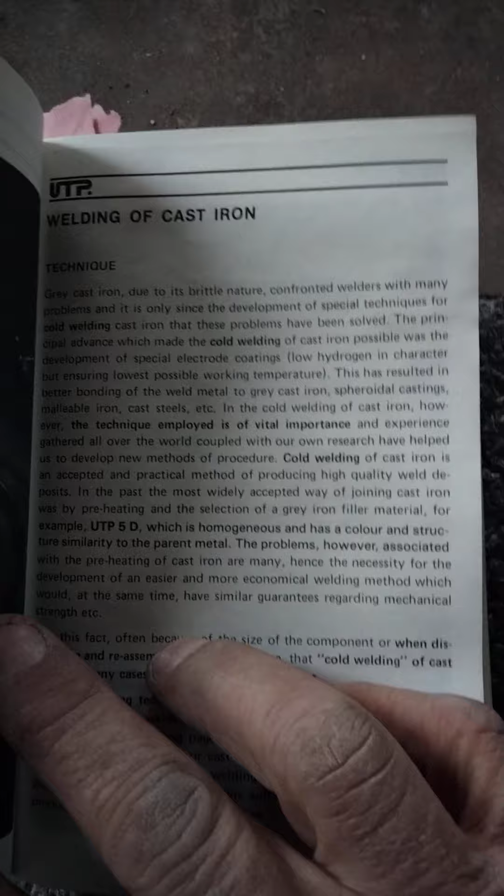I ran into a guy, well, one of my accounts there in the 90s, and they needed a bunch of brass wear lugs welded onto a steel mast on a forklift, with a bolt hole. It was a bolt through originally, and that was all jacked up and stripped out, and they were like, shit, you can't do that. And it was like, yeah, well, let's see if we can do that. Pulled out the welding Bible, flipped on through it, and this thing's pretty cool. Each section, you know, cast iron or whatever, it tells you exactly what you need to do. If you follow the steps provided in this book, it'll work every time. I've never had a problem with anything.

UTP cold welding systems for cast. They're real good on, you know, preparing and what you got to do, and pictures for how you want to be.

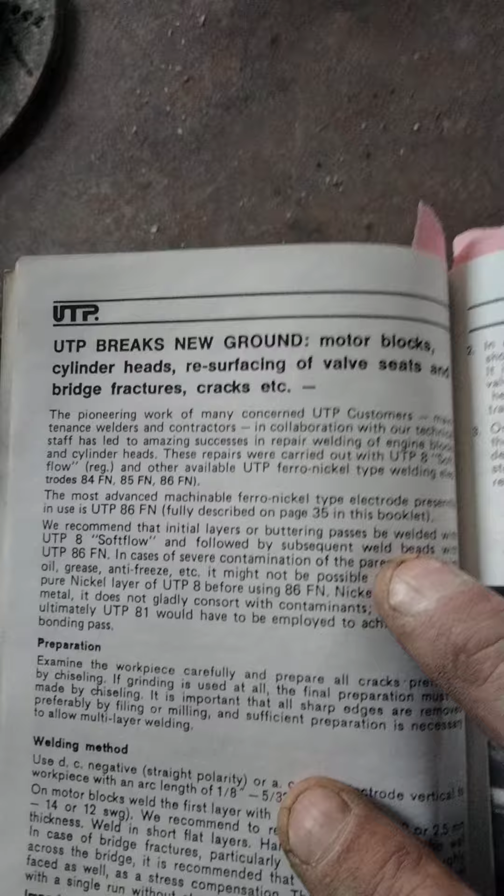So it was like, all right, so we need to weld brass or copper to steel. So I pulled out the Bible, started going through it. I put a couple things in here. Hot welding of cast iron. They got a lot of good cast stuff. UTP breaks new ground, motor blocks, cylinder heads, resurfacing of valve seats, bridge fractures, cracks, etc.

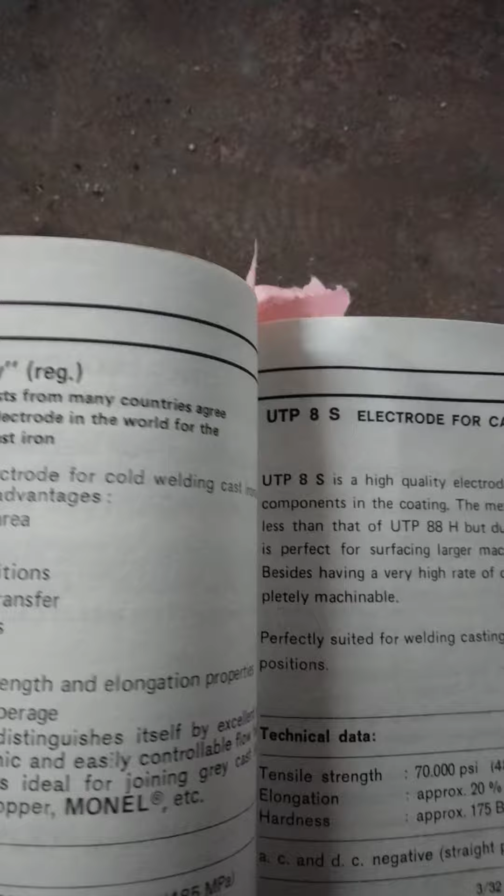But if we keep going here, I think I marked that in here somewhere. We're on into the cast stuff.

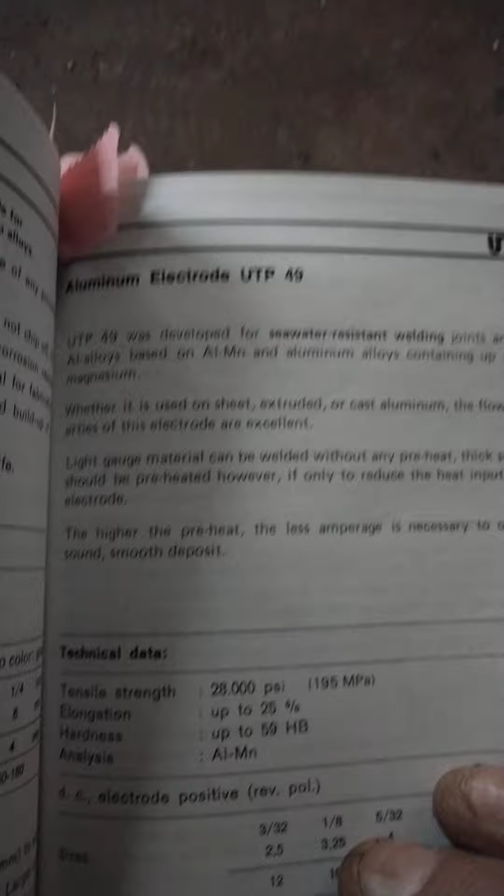Gets down into the aluminum rods, tells you all about the aluminum rods. The UTP 49 is the main aluminum rod that I used for aluminum, and it gives you all the specs. There's your elongation, there's your tensile, there's your hardness, tells you which polarity to run, how many amps you should basically be running.

I thought, unless I missed that, I thought I had just marked. Maybe it's the one after this one. I went through and kind of marked it. White metal rod, UTP 41, magnesium rod.

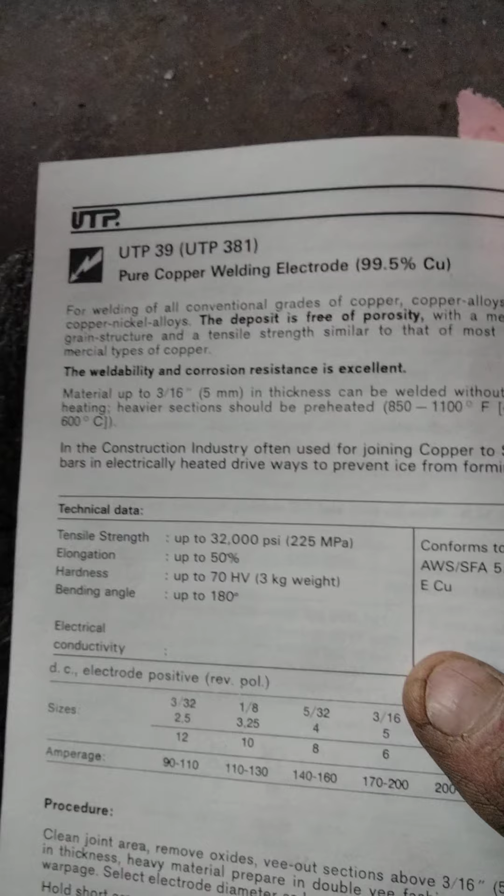They got stuff in here for the railroad, you know, that meets the specs for the stuff I've been welding on the railroad. Let's see here, where did we end up on that? There you go, UTP 39, pure copper welding electrode.

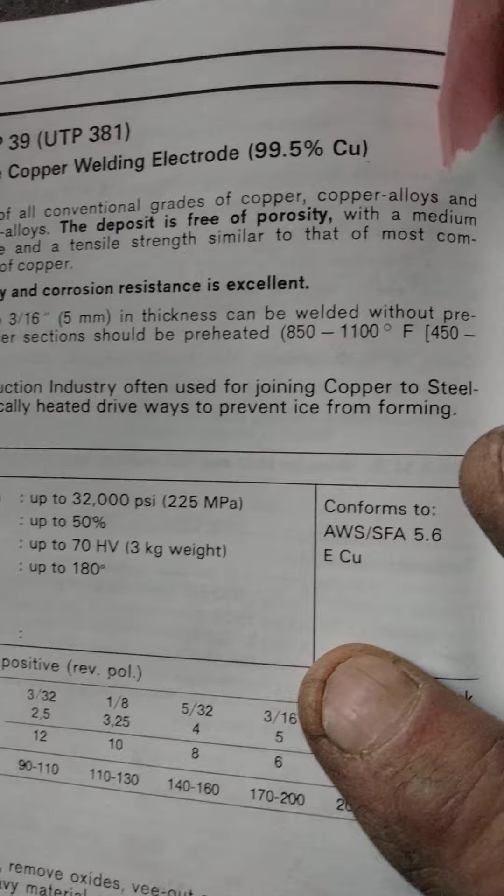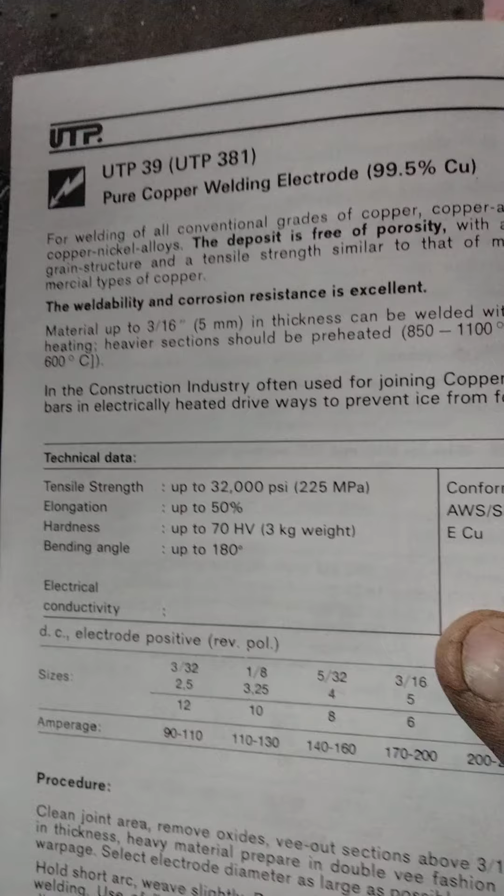In the construction industry, often used for joining copper to steel bars in electrically heated driveways to prevent ice from forming. So I ordered up some of this UTP 39, turned right around and welded the brass and copper wear plates straight onto the steel mast. Did that for probably 6 different forklifts, I bet, for them. Just stick welded the brass or the copper straight to the steel. Not one of them broke or anything, so elongation up to 50%.

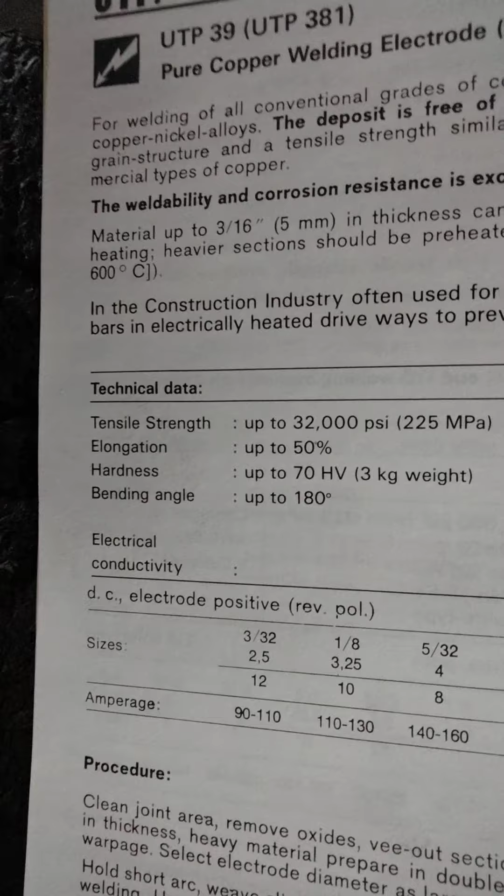Holy cow, that's killer. 32 on your tensile strength. But it doesn't matter what you run into. If you have your little Bible, you can pull this out and look up anything that you need to do.

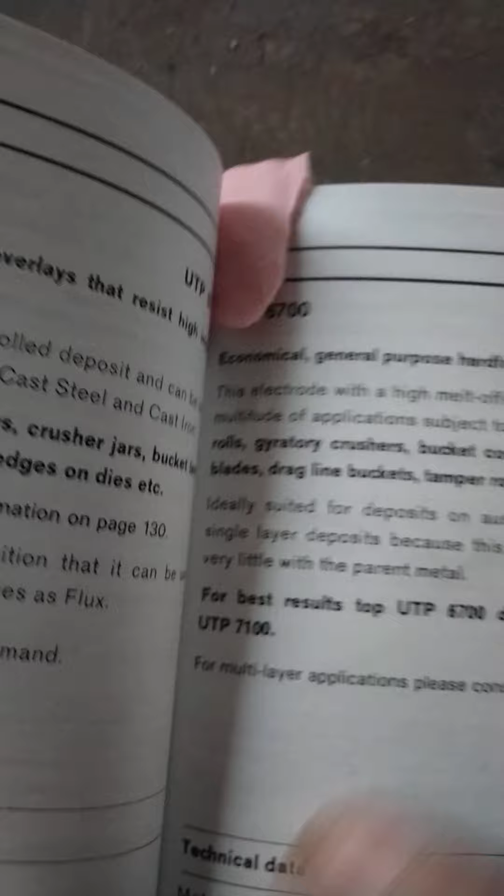I just keep one in the truck with me so that, you know, there's the UTP rail weld. This is the hard rod that I used before I found metal powder rod. It's UTP 6700, and it's a double layer thing. You're supposed to put down the 6700, and then you're supposed to cap it with the UTP 7100.

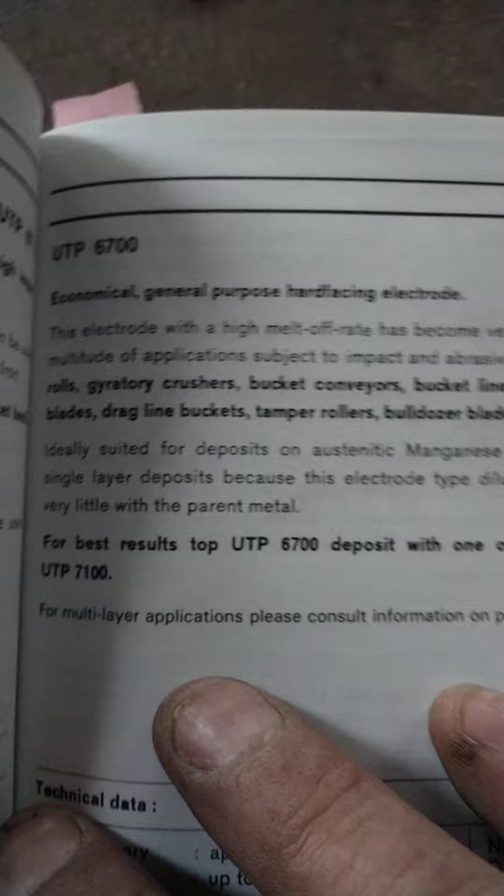That's what I used on wood grinders for 20 years, was this UTP 6700, until I found the metal powder rod. If you go back through my videos, you'll have to go back about a year or so, but there's a video on metal powder rods, and that's just way better.

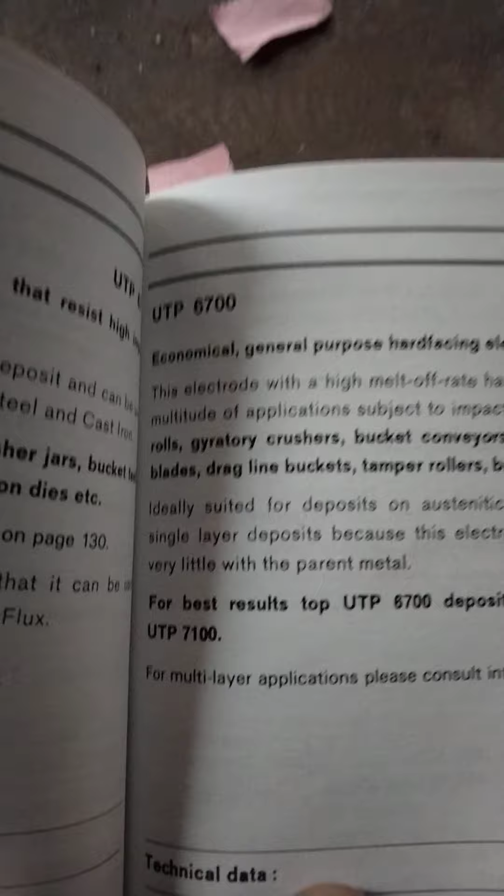One of the main reasons was the rod recovery rate on the 6700, and I put that in the video that I made a year ago, is only 130%. The rod recovery rate on the metal powder rod is 200%. So the last time I did the wood grinder with this here, it took 32 sticks of the UTP 6700, and that was 3/16 rod, pretty big rod.

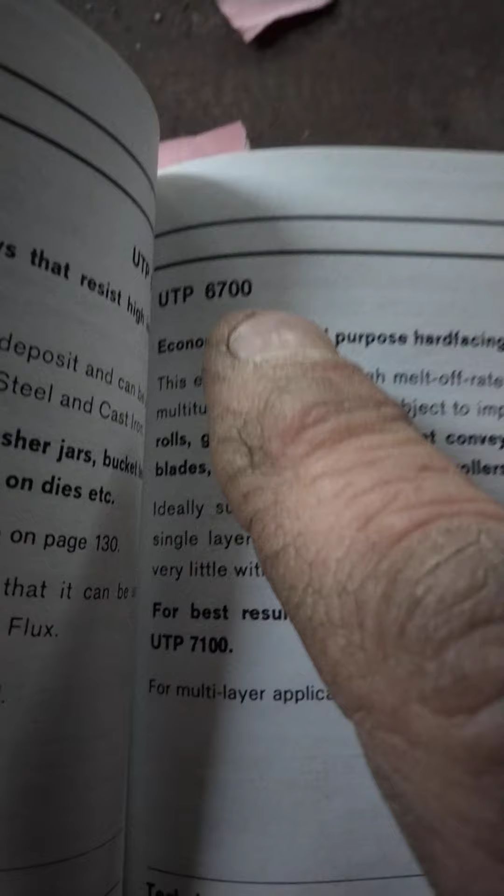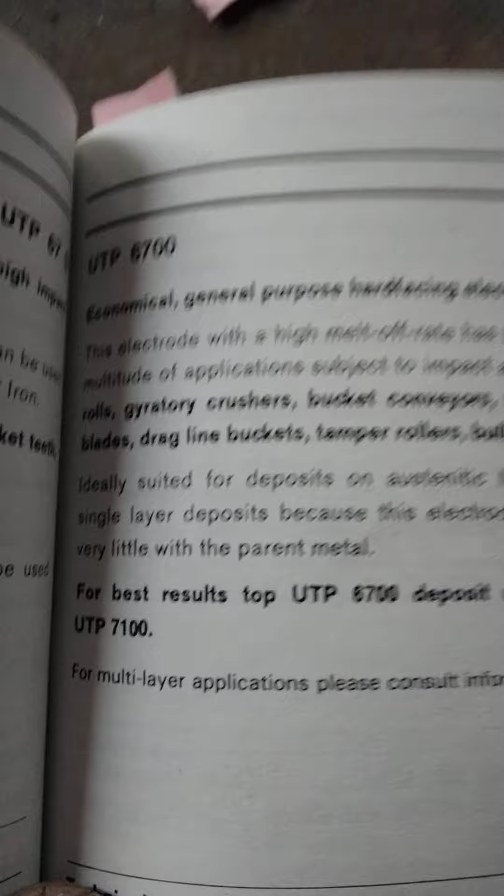It took 32 sticks of this normal rod, and I did the exact same thing with 11 sticks of that metal powder rod. So like I said in that other video, that metal powder rod costs a little bit more, but it goes 2-3 times farther. So you're really saving money is what you're doing.

But as long as you got your Bible, man, there ain't nothing you can't do in here. I mean, everything in here that you could possibly need. Chamfer rod, that's some really good chamfer rod.

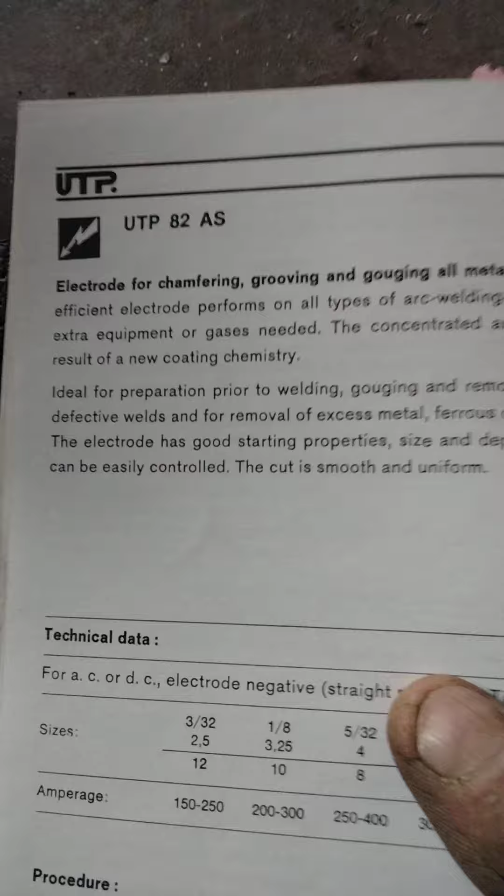They just had the UTP 82 when I was at the drilling company. They just came out with that UTP 82 AS. That is some awesome chamfer rod right there. Really good stuff. But everything's in the book.

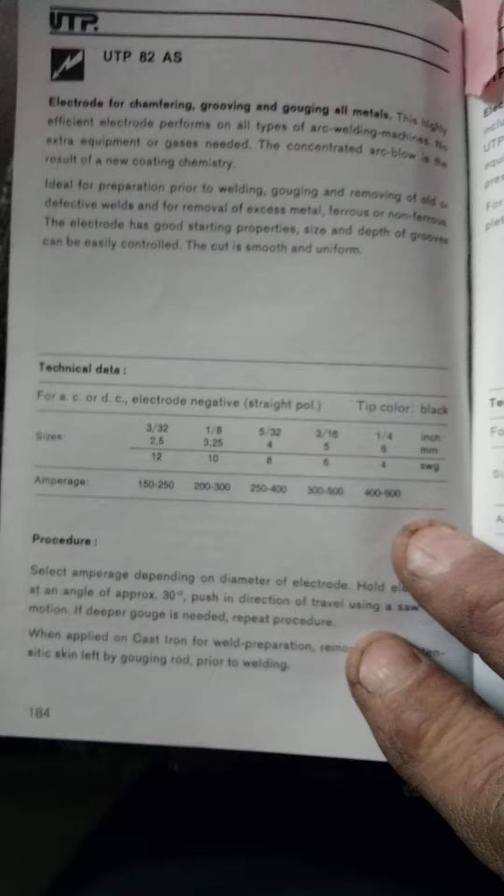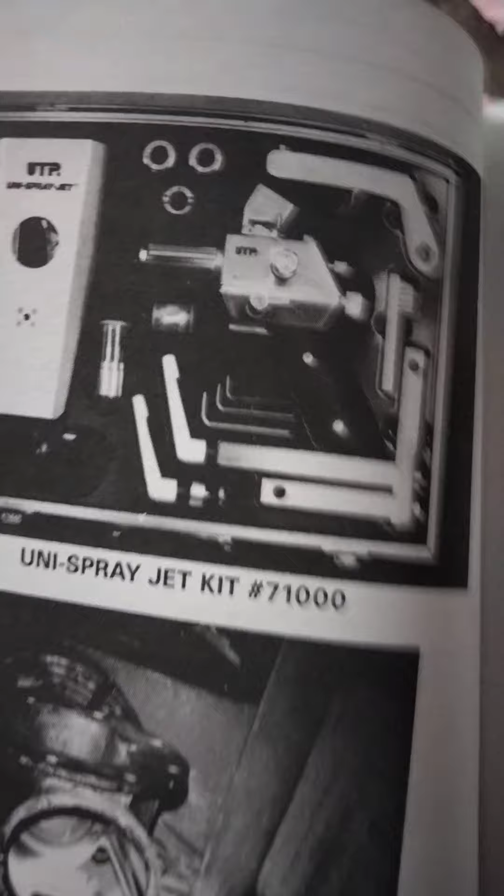I mean, like I said, it tells you what polarity to run, what amperage is basically required for each rod. A lot of Uni-Spray stuff had just came out in the 90s. But each section has its own set of literature and stuff you're supposed to do and follow.

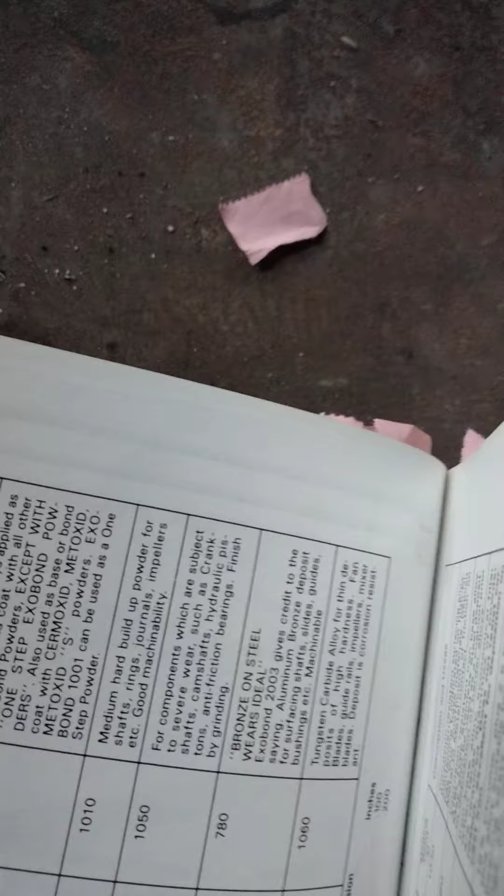I had a job I did in the 90s at that drilling company, we were doing the Denver library, and they had busted the frame on a big loader. It was like an IT-28F or something, if I remember right. And here's another good thing about the book.

It shows you how to identify different steels by the different sparks that come off. You can actually identify steel by the pattern that the sparks make when they're coming off. And that's how I used to do it, until I learned that you can torch cast steel, but you can't torch cast iron.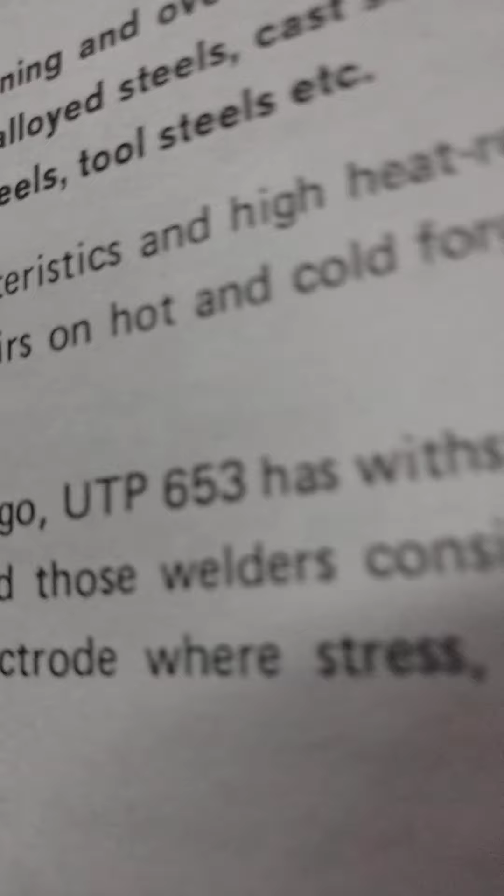But anyhow, that Denver library job, that IT-28 loader, the main frame on it was probably a 4x10, maybe a 4x12 rec tubing, and they had busted it all the way down the inside, all the way across the bottom, and all the way up the outside. The only thing that kept the frame attached was that top 4-inch lip of tubing. That's what kept the loader from literally falling in half.

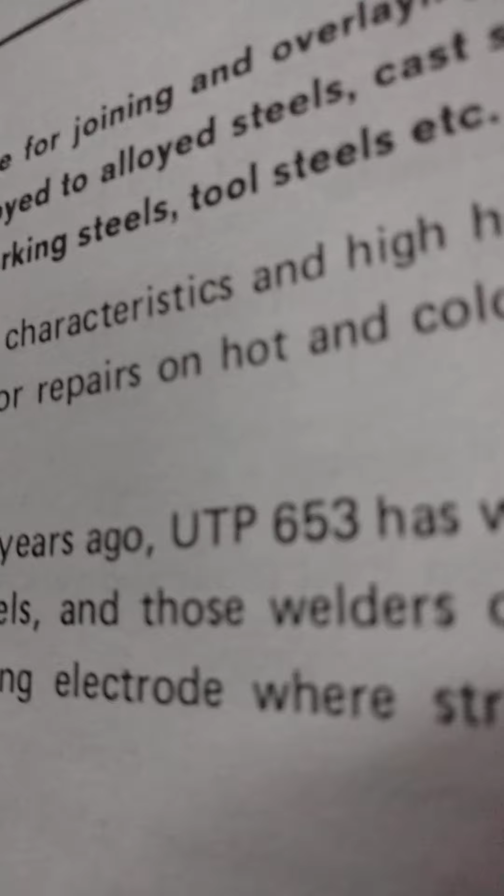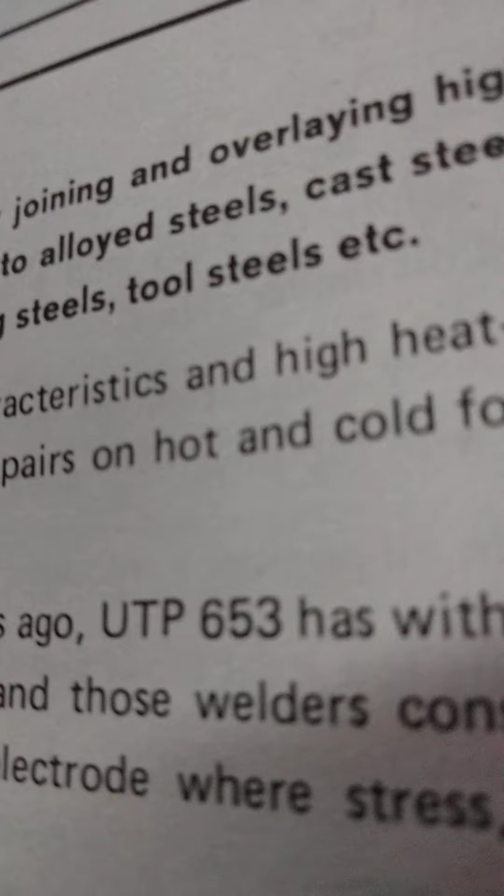So I went in there, ground it all out. They called me down there. I went in there and ground it all out and threw some 70-18 on there, and all I could get was half of the back because there was stuff in the way. And then I got the bottom, and I got that outer side. And it held in there for a few days, but it cracked again.

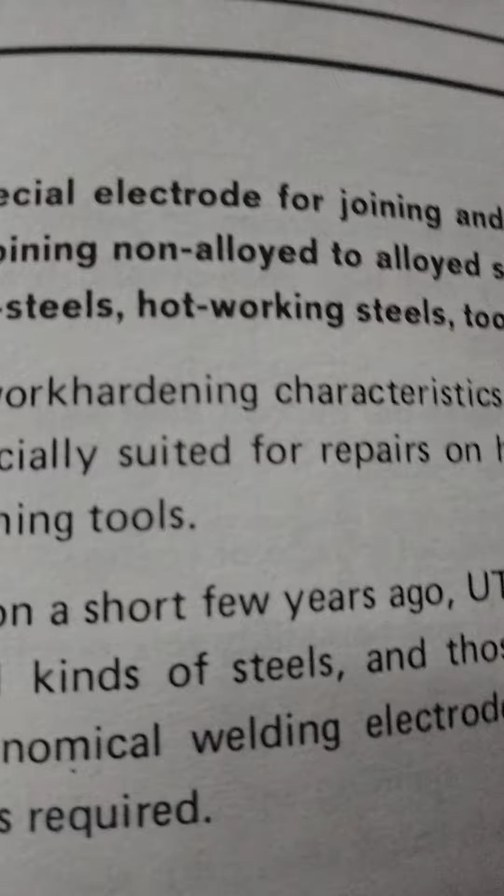So then I went ahead and beveled everything out again and cleaned it all up, and I fried it with 110-18. It's almost twice as strong. But it didn't last any longer, it only lasted 3 or 4 days. And they didn't want to shut the loader down, it would have just screwed the whole job up. So they were barking at me, you better pull a rabbit out of your frickin' hat.

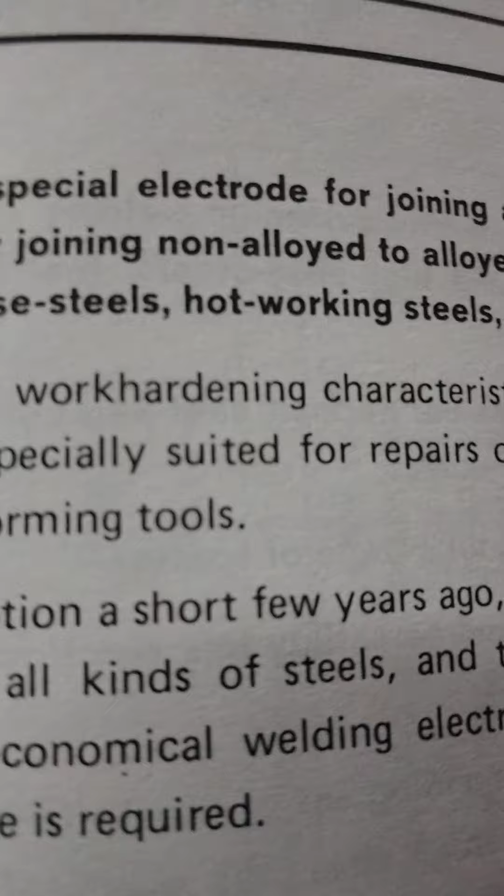So I pulled out the Bible. It's like, well, 70-18's got 32.5% elongation and didn't stretch enough, and it still broke it. The 110-18's got 24% elongation, and it didn't hold in there any longer. So I'm thinking in my mind, it's like, well, the extra strength didn't do me any good. I got to find something that flexes more than that 24% that the 110-18 had.

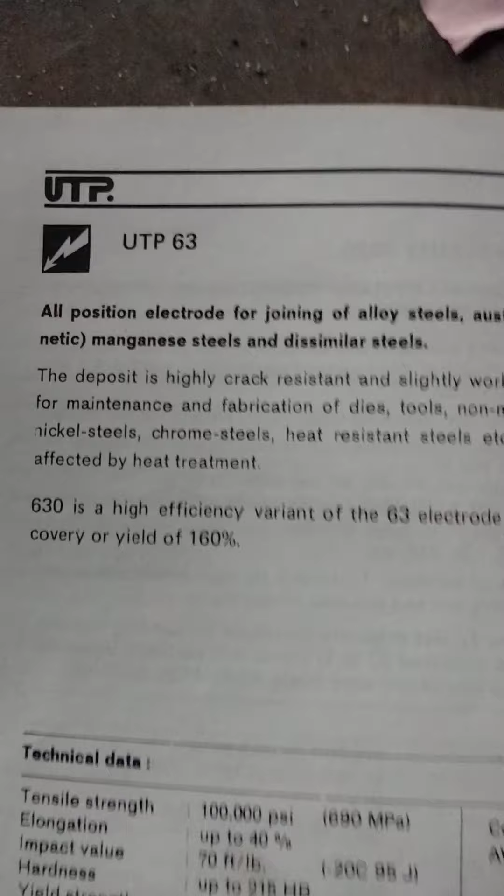So I pulled out the Bible. UTP 63, all position electrode for joining of alloy steels. 630 is a high efficiency variant of the 63 electrode with a metal recovery or yield of 160%, so that's pretty good on the rod recovery rate.

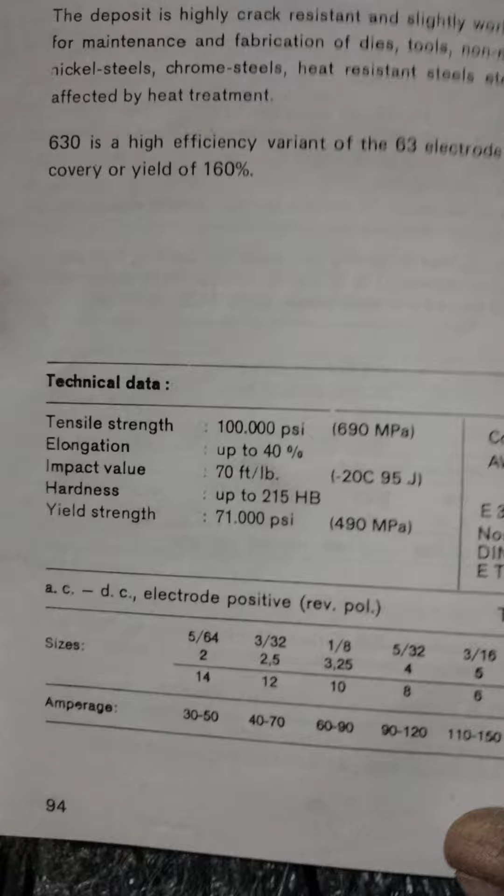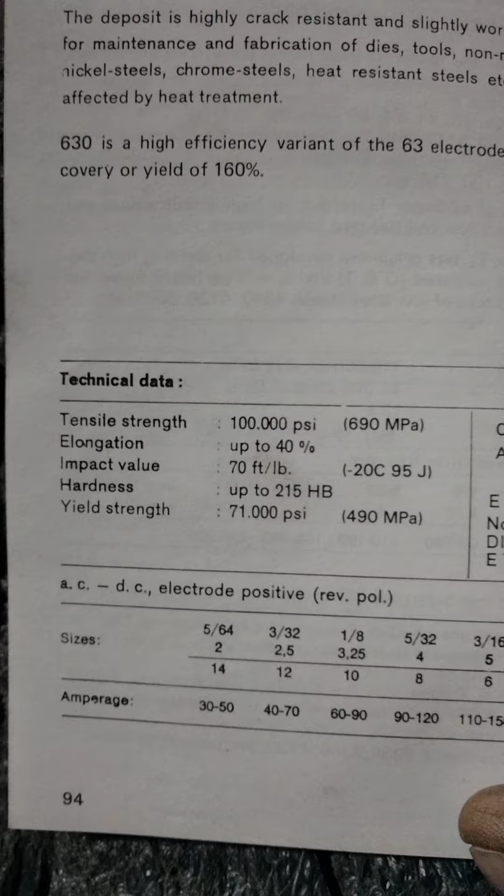But I just started going through the specs, and this is what I found. Tensile strength, 100,000. Well, that's just as strong as the 110-18. Look at the elongation. Elongation on 110-18 was only 24%. Elongation on this specialty rod is 40%, but it still has the tensile strength of the 110-18.

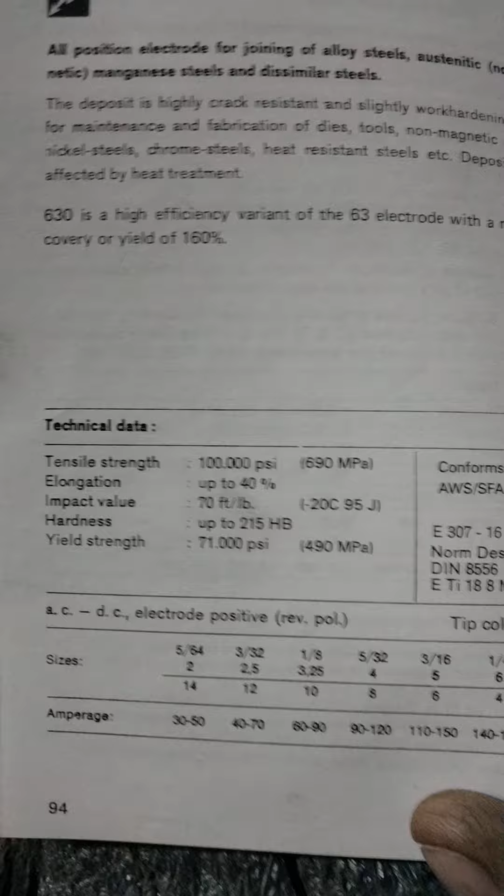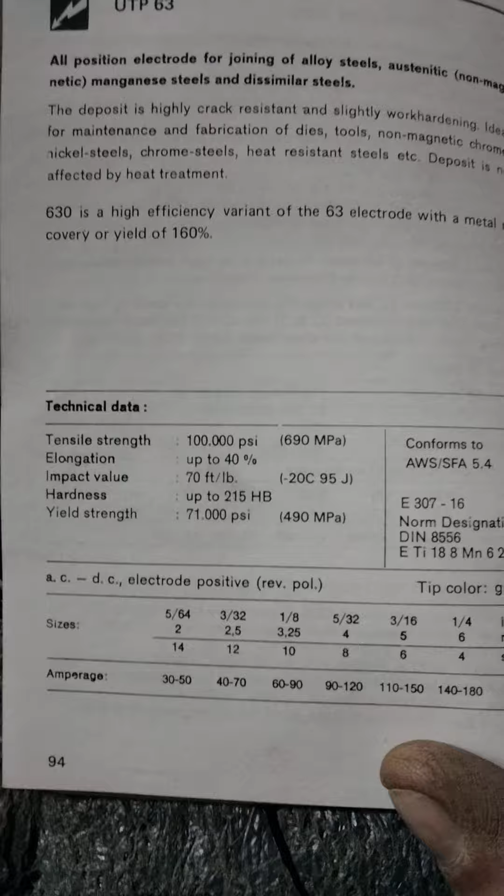So the third time I welded this frame up on this IT, I did the same thing, cleaned it all up, beveled it all out, and went ahead and picked up some of this UTP 63. Same thing, I could only get half of the backside, got all the bottom, got all the outside all the way to the top. They drove it for like 4 more months.

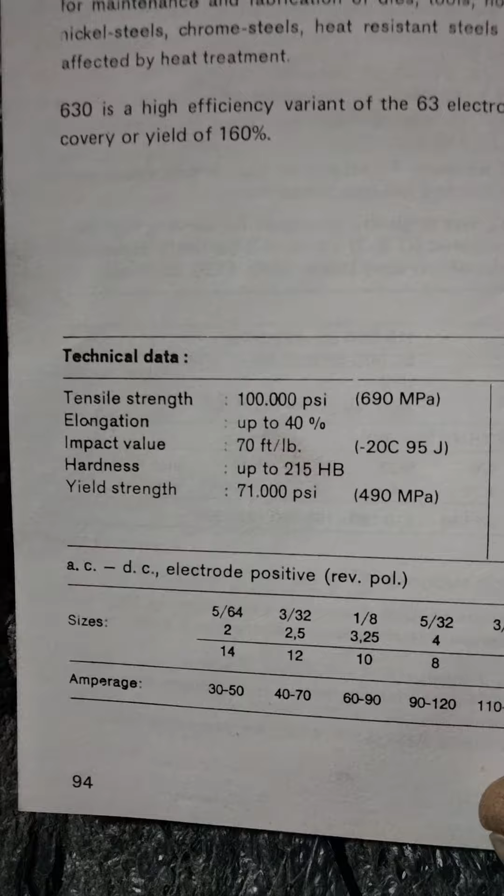It never busted again. That extra elongation is what made the difference. It held in there with the tensile strength, but the elongation is what made the difference. It let it flex more without tearing or separating.

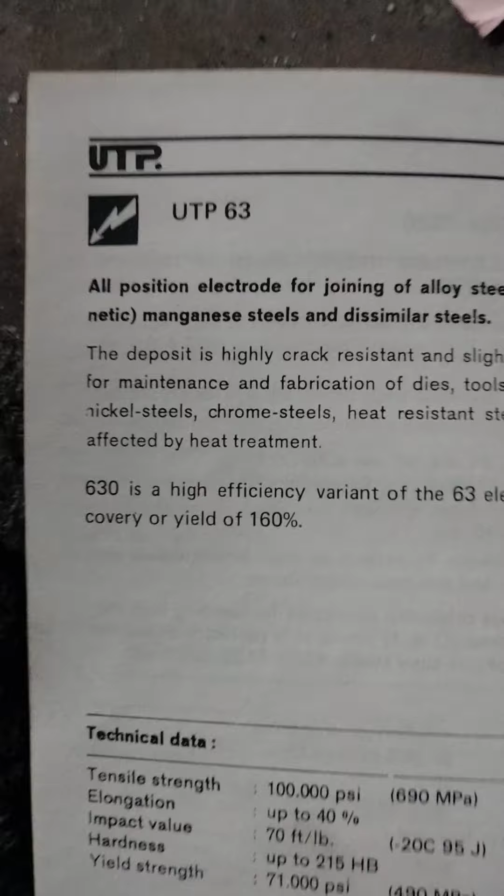But if I hadn't been big on literature, like I'm always preaching to everybody, I wouldn't have known that. If I didn't have my Welding Bible, I wouldn't have known you could weld brass or copper to steel. I wouldn't have been able to figure this stuff out if I didn't have my Bible.

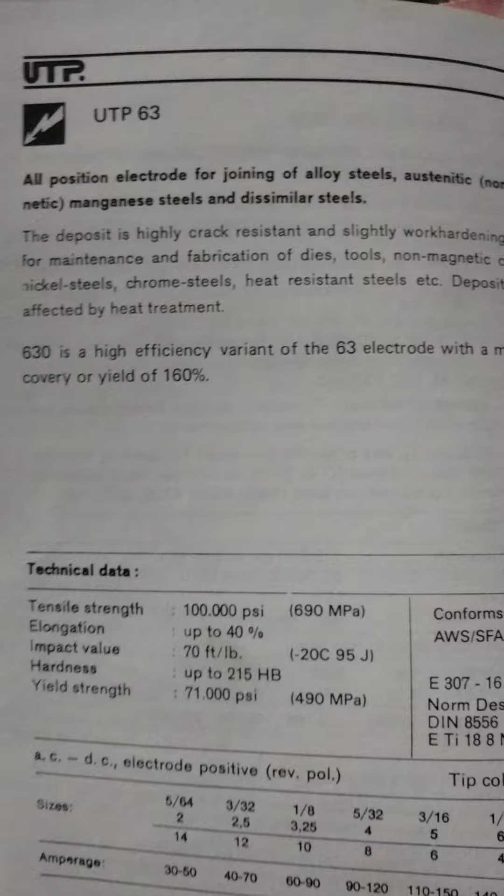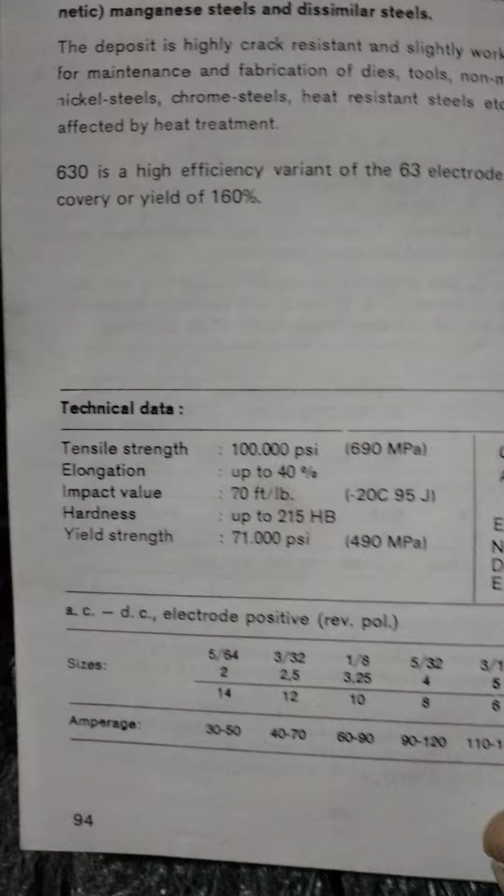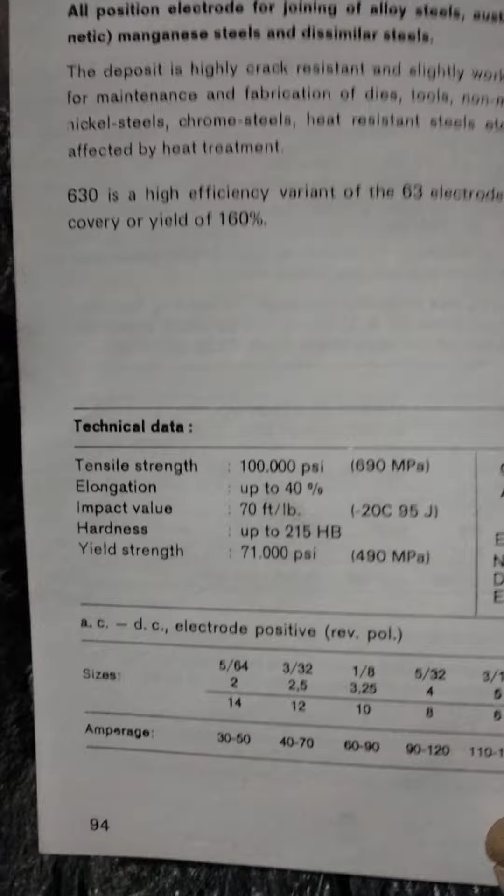And that's what I did. I went back to the shop, pulled out my Bible, and just started digging. It took me a while, but that's where I ended up. Literally, it only lasted 3 or 4 days with the 70-18 and the 110-18. I cleaned it all up and fried it all up again with this 40% elongation, and it went months. It finished the job out. It was 3, 4, might even have been 5 months. It was a big-ass job, man. It was literally the new Denver library in the 90s.

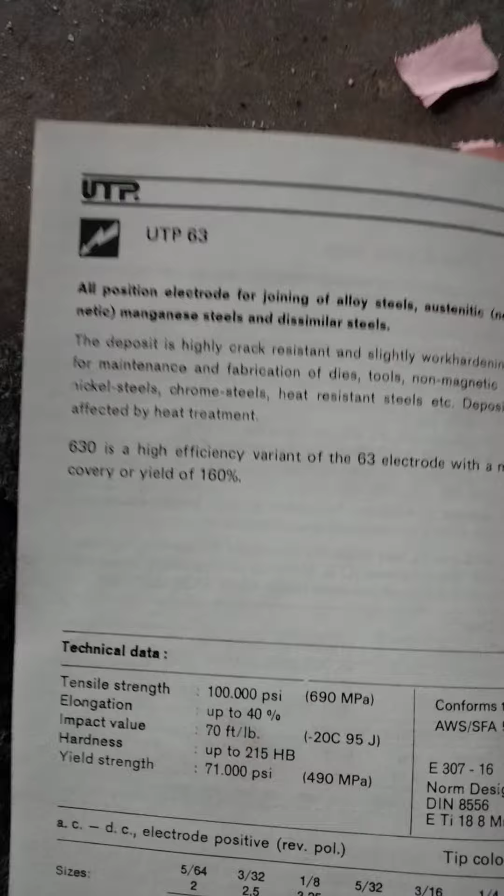But I just wanted to pass it on for all you guys trying to suck up stuff and get out on your own. You need a Bible, man. I don't know who they're pushing these days in 2020, but you can still get UTP. Everything I've tried in this book worked perfect. I didn't have one problem through decades with these UTP products. It's maybe a little pricier than some of the other stuff, but you get what you pay for.

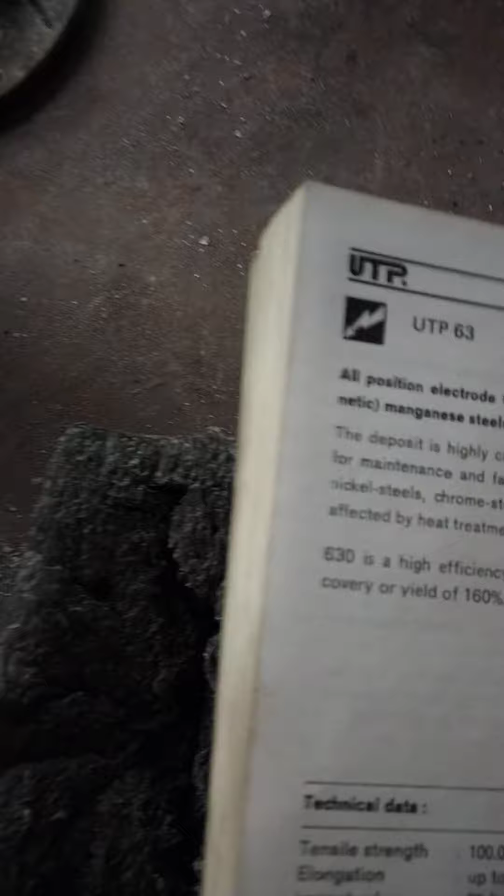And then just follow what they tell you to do. It gets down into the beginning of it here.

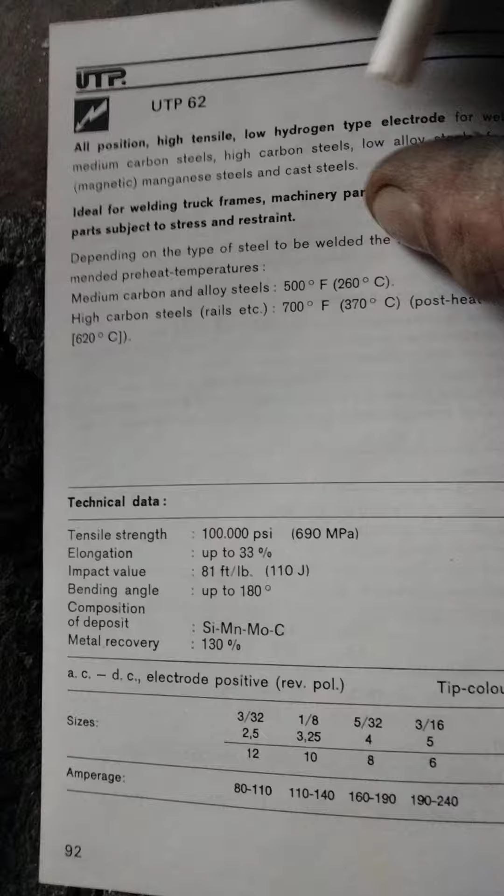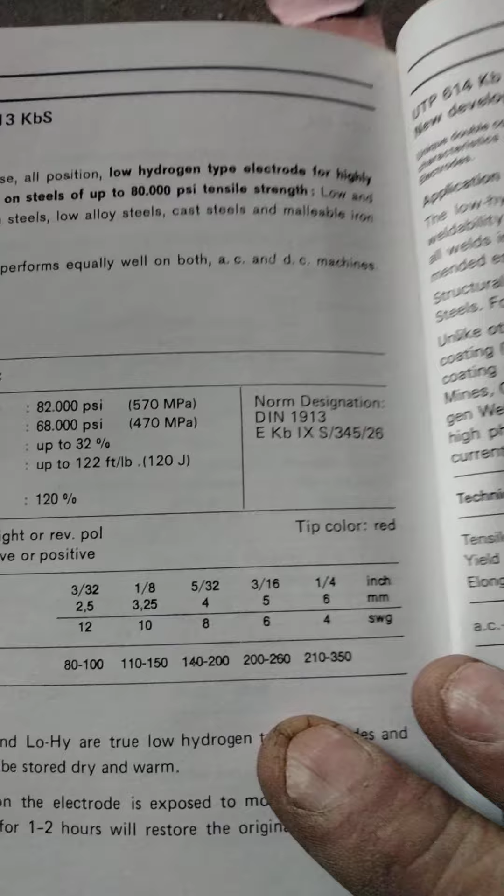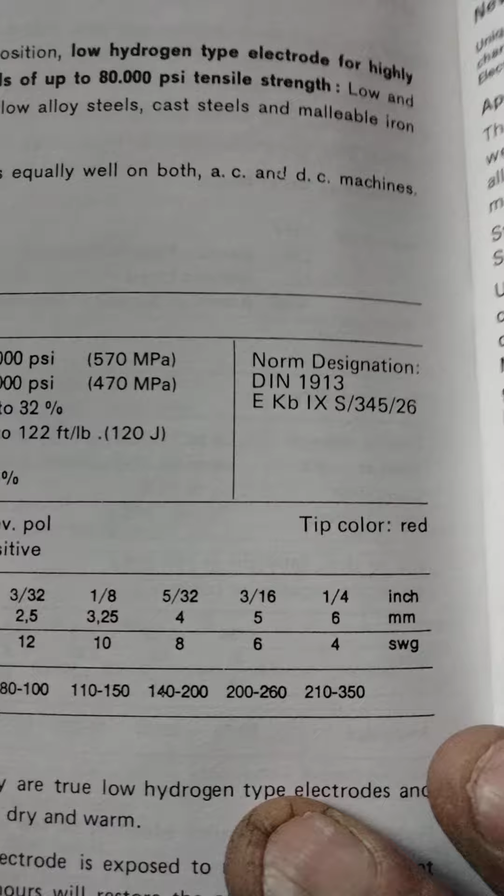UTP 62, I used that a lot too. It was 100,000 tensile, tensile strength, 33% elongation. I used to keep that on hand in case I ran out of stuff. But 613, that sounds familiar. What was this stuff? Highly stressed joints on steels up to 80,000 tensile, low and medium carbon steels, low alloys, cast, malleable iron to steel. So you could weld cast iron to regular steel with this 613.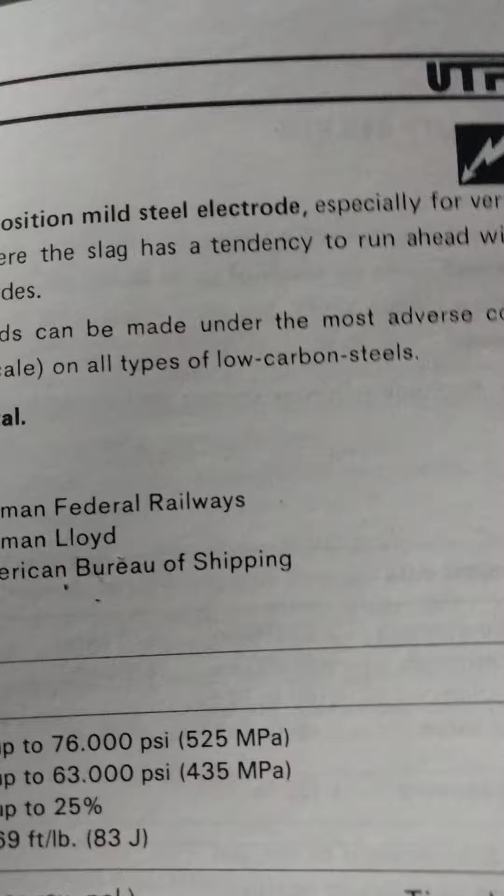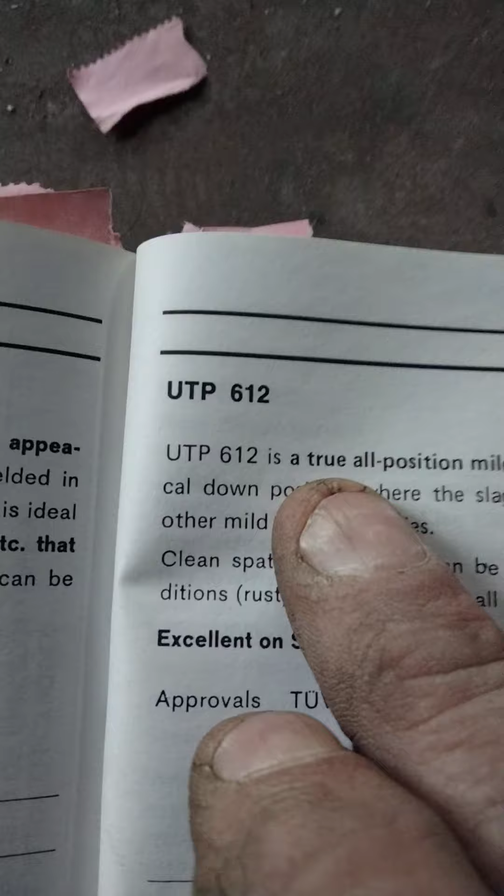That's why that 613 looks familiar. I think that is what I was getting in 5/64, which was just like pencil lead. Maybe it's the 612 - this is it. This is what I used to repair all the fuel tanks. I'd repair the diesel tanks while the rig was sitting there running. I'd take a big exhaust hose and put it over their exhaust and plumb it into the fuel tank, and this stuff works sweet. I'd get it in 5/64, which is literally like the size of a pencil lead, and it's the smoothest downhill running stuff, man.

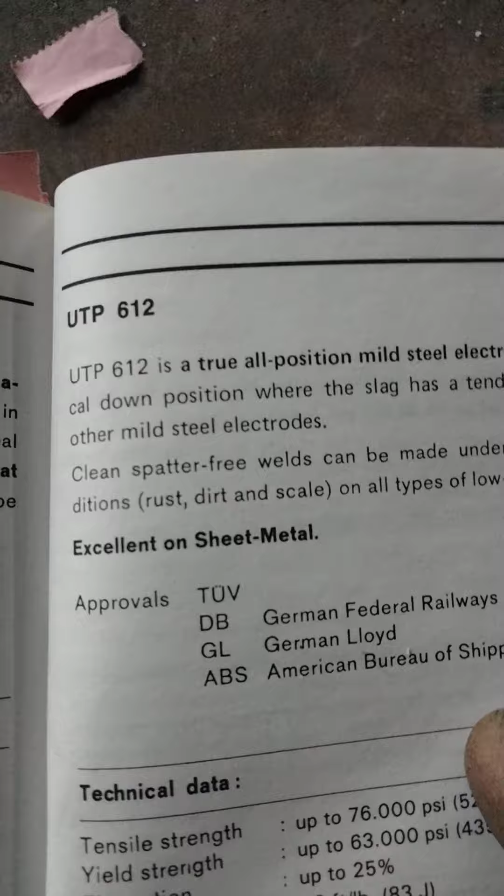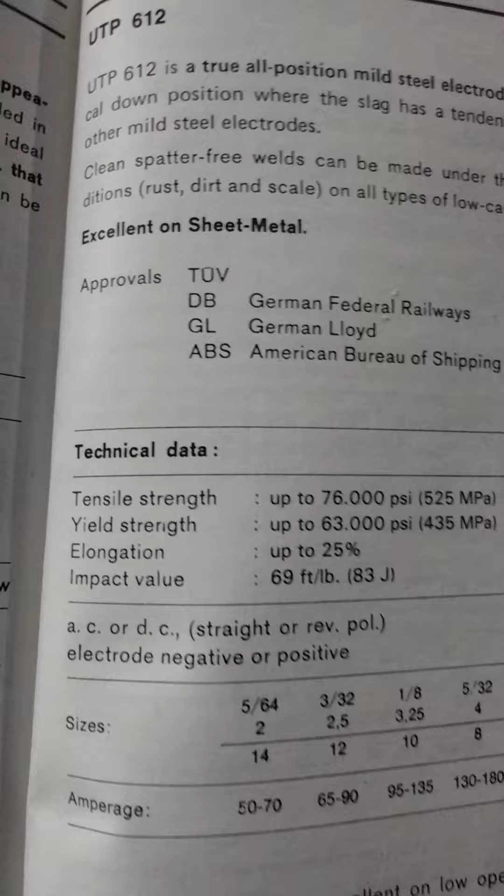Especially, yeah, it says right in there, especially for vertical down position where the slag has a tendency to run ahead. So it's kind of like a 60-13. It's not a deep penetrating rod, but I repaired countless fuel tanks with that UTP 612. Awesome stuff. There's all your specs on it, your tensile, your elongation, and how to run it, the different sizes, and that's what I was getting, that 5/64 right there.

So I just wanted to pass some of that on, pass on the quick library story. We were screwed on that job until I found that UTP 63 with the 40% elongation. I was even impressed that it went months and didn't re-crack or re-break.

Good stuff. So just a quick other tip for those of you serious about getting into it, man - you need a Bible. You need a go-to for your literature.

Back in the 90s, people used to laugh at me. They were like, 'You're the only guy I know of that read that damn book from front to back.' I needed the info, man. I literally had other shops that would just call me on the spur of the moment - 'Hey man, I know you read that whole frickin' book, we got to do this and we need that, what would you recommend?' Do this, do this, and get some of that, and you should be good.

Right on, thanks man. So anyhow, I know you can still get UTP. I don't know who's big these days on it. If I'm in a bind and need something specialty-wise, I'll still order up the UTP. I used it for decades, I know it works real well. So anyhow, Weldors Bible - a lot of good information in it. Everybody be safe.